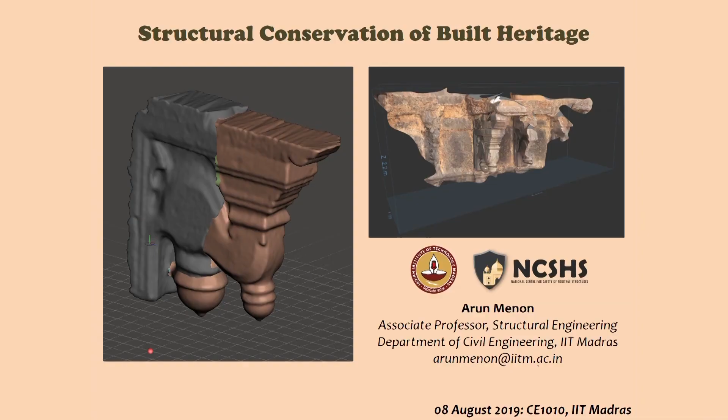I am Arun Menon, a faculty member in structural engineering, besides the building sciences block. I did my bachelor's in architecture, then moved into civil engineering, did my MTech in building technology and construction management, and then my PhD in earthquake engineering. I focus on masonry, and that's how this interest in historical masonry structures and monuments came about.

As Professor Gettu mentioned, that logo next to the IIT logo is the logo of the center we run at the Department of Civil Engineering, referred to as the National Center for Safety of Heritage Structures. We're talking of structural safety. We work on a number of live projects in India and abroad, but we also do a lot of fundamental research in the subject of historical monuments or built heritage in a broader sense.

Today I'll be talking about structural conservation of built heritage and how it is a highly interdisciplinary subject where you can connect based on the kind of interest you have in different subjects of arts and science. I'll take you through one example we've recently been working on, which gives a perspective of how multidisciplinary the problem can be, and challenging at times, where engineering comes in, engineering judgment has to be used, and tools available to engineers and researchers would have to be utilized.

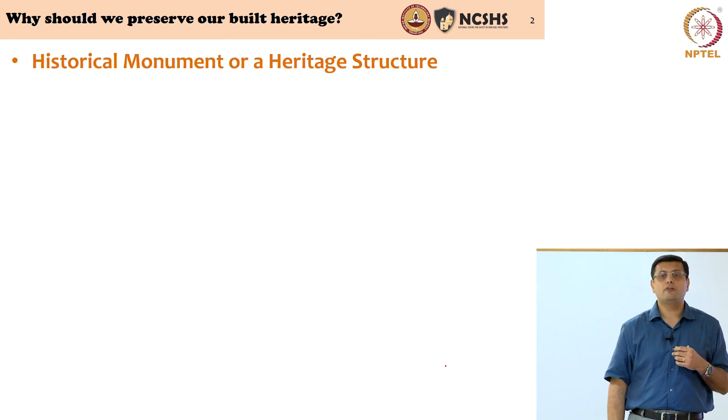We are either talking of monuments, which may be historical monuments or heritage structures. To give a definition, a heritage structure or historical monument is a structure created in the past. Some amount of time has passed from when it was established and constructed to commemorate a historical event or a historical person, or which has become important to a community.

This community can be a local community—something very important to Chennai, or to IIT, the community of IIT. So it can be something that has become important to a community, a region, a state, a nation, or the world at large. This has now become a part of our history and our cultural heritage. That is what would define the built part of the cultural heritage itself.

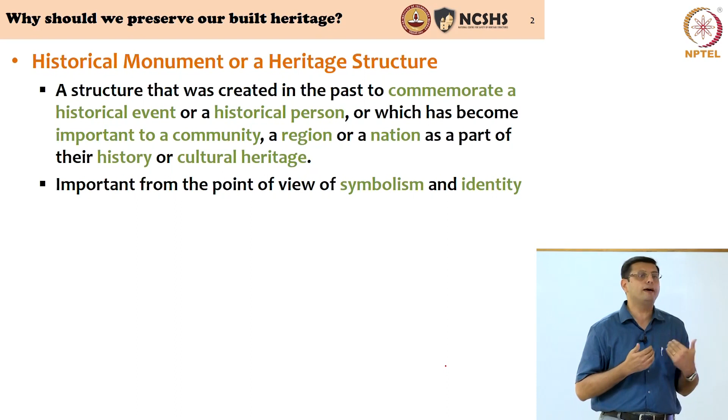Such an entity starts becoming important from a point of view of symbolism and identity. It tells me about my roots. It is symbolic to me as a physical form that exists in my territory.

What are we going to do about this? This was possibly not built when we were born, or even our immediate ancestors were born. Some of these were built 4,000 or 5,000 years ago, some maybe a few hundred years ago. So this is from a different period in time. Why should we be bothered about protecting them?

We should look at ourselves, in the context of historical monuments and heritage structures, as mere custodians of historical evidence. This is the physical historical evidence on earth, on territories, of how our ancestors lived and how their history and their times unfolded. Our responsibility is only as custodians to hand it over to the next generation, so that this historical evidence is available to them to understand where they come from and what their land means in the context of life on this earth.

Preserving historical monuments or heritage structures does not mean we have to go back to ancient times and live like our ancestors lived. That's not the purpose at all. The purpose is to understand how life evolved and how our ancestors lived. We can draw inspiration from that, look at what is relevant in today's context, apply that, and give new form to that inspiration. That's how we connect the history, the past, to the present and the future.

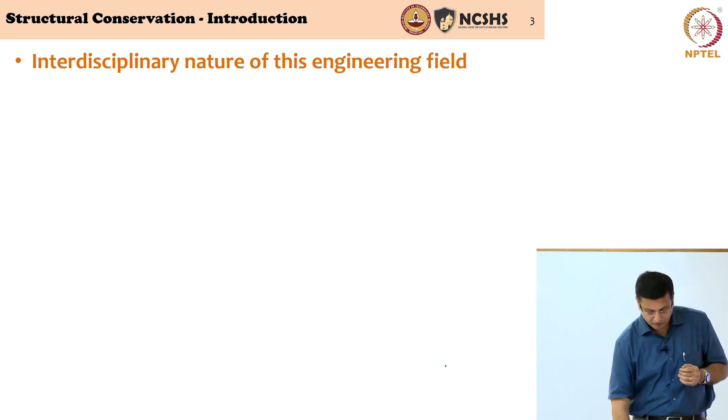So it's structural conservation that we are talking about, but it's a highly interdisciplinary field in engineering, and not only engineering—it actually has boundaries with many other disciplines. To give you probably not an exhaustive idea, but just to introduce you to the linkages with other subjects, there's a list that I've prepared.

Preservation of built heritage requires collaboration, fundamentally between the arts and the sciences. You've entered an engineering college, right? You need to engage with the arts and the humanities because there is relevance to everything that you do in engineering to human society.

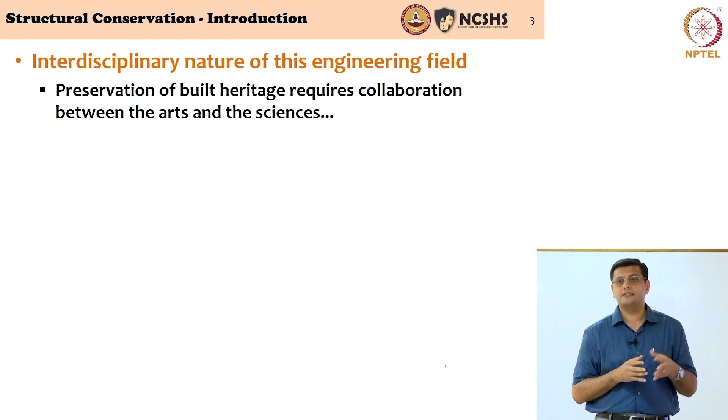And that is the reason why we have courses in humanities interlinked throughout your engineering program, because you need to understand the value of what you're doing and how it comes back to the society, how it comes back to the community. So you cannot differentiate between arts and science, and particularly in fields such as conservation of built heritage, it becomes primary to understand the linkage.

So many of you sitting here might have different interests. I had very different interests before I came to study architecture and engineering. And therefore, you can really connect to a certain passion that you have for a subject in this varied and interdisciplinary field—history of construction.

History of construction and archaeology, where you're studying about ruins and trying to reconstruct the way people lived in the past. Architecture—some of you might be interested in knowing different materials that have been used, different forms, different styles of architecture. You need to link up with architecture.

You need to learn, you may need to work with people who are in the area of material science and material engineering, because in civil engineering there's a limit to which we study materials. You might need a material scientist to take you further and understand the composition, the atoms, the way the material itself is formed.

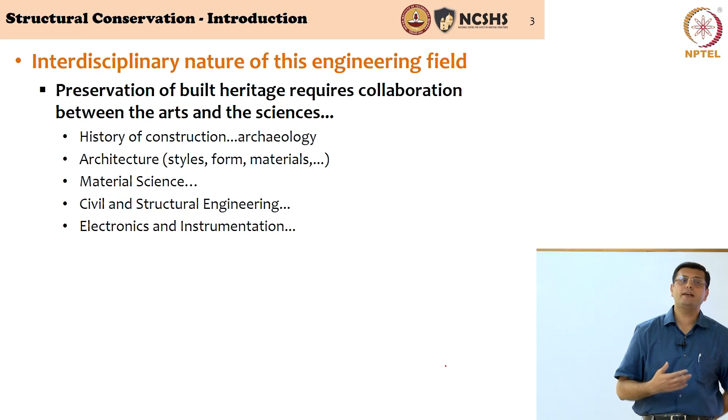Civil and structural engineering and geotechnical engineering—all disciplines of civil engineering. Electronics and instrumentation—today we are depending heavily on electronics and instrumentation to understand how these structures behave.

You can put sensors on these structures. You need to design these sensors and design the data acquisition systems, and have automatic methods, automatic techniques of getting information from these structures and understanding how they behave structurally. So you need to engage with experts from electronics and instrumentation.

Or you could have an interdisciplinary field of training and research for yourself. You can be a structural engineer and an electronics and instrumentation expert.

Computer science engineering—we are depending so heavily on computer science engineering because of the programs and algorithms you require to gather data from buildings, to process large data, the big data that we are talking about, to look at image processing and image reconstructions. You need expertise coming in from computer science and engineering.

Botanical sciences—would you ever think botanical sciences would be important in structural conservation? We have several cases where trees are growing on monuments. Have you seen trees growing on monuments?

Definitely you would have seen trees growing on monuments. In many cases, you have to have some idea of the type of vegetation that is growing to be able to either remove it or preserve it. We have dealt with very strange situations where both the monument and the trees had to be preserved.

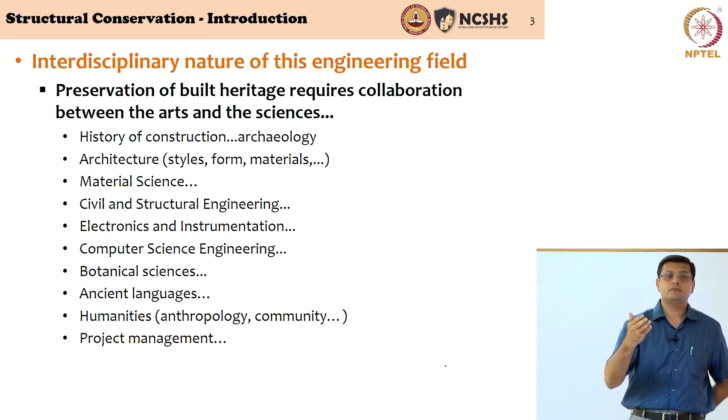Project management. If you're doing a huge project of conserving a monument, you need to have someone who is trained in construction project management, who will be able to sequence and utilize resources, men, material, labor in a technical skill in a proper and systematic manner.

And very often, the whole exercise is forensic in nature. Right? You've heard of the word forensic? Yes? And why does forensic come into civil engineering?

Very often, the damage that you see in these structures, you do not know why that has occurred. You would actually have to play the role of a detective and try and understand what was the reason for the damage. Because unless you know the reason for the damage, you will not be able to come up with a remedy in the right manner. So you will have to put on your hat as a detective, but a building detective, and then examine the structure and arrive at answers of what is the cause for damage before you intervene in such historical constructions.

These historical constructions have been here for hundreds of years, some of them thousands of years. So you have to respect it. It's been there for several centuries probably before you, and therefore it is with that respect that you must engage with these structures, and for that you need as much information as possible from these monuments, and very often we are acting as forensic engineers as far as historical monuments are concerned.

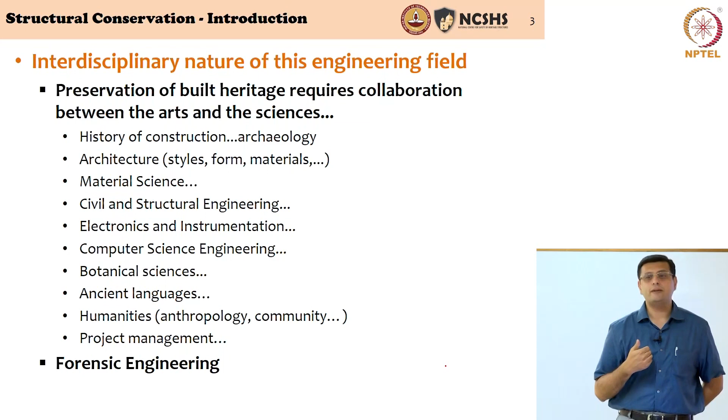Very interesting, I've had a very interesting training over the years. I was interested in medicine, but I didn't make it to the medicine field. I got into architecture and engineering, but today I find myself as a building doctor. And I see a lot of parallel. Of course, the blood and goo is not there, but I do see a lot of parallel between what a doctor in a medical profession would be doing, a surgeon would be doing, to what an engineer would be doing as far as rehabilitation of ancient buildings are concerned, right?

Okay, having said that, how do you operate within structural conservation? There should be a process, there should be a methodology, a modus operandi of how you operate. And this is where I say it's very similar to how a doctor would operate.

If when you're confronted with a problem, let's say your building is damaged, the first thing that you do, referred to as a stage, is referred to as anamnesis. And in the anamnesis stage, you're basically asking random questions to anybody who's engaging with the building. And this is to try and make some sense of what the problem is, how long the problem has been there, and so on. If you go to a doctor, the doctor would ask you, let's say you've got a headache and you're going there.

Have you had good sleep in the last few days? Or have you had temperature? What did you eat? You have these random questions that the doctor asks you so that he or she can structure the problem to get a hold of what is happening, right? That stage is called the anamnesis stage.

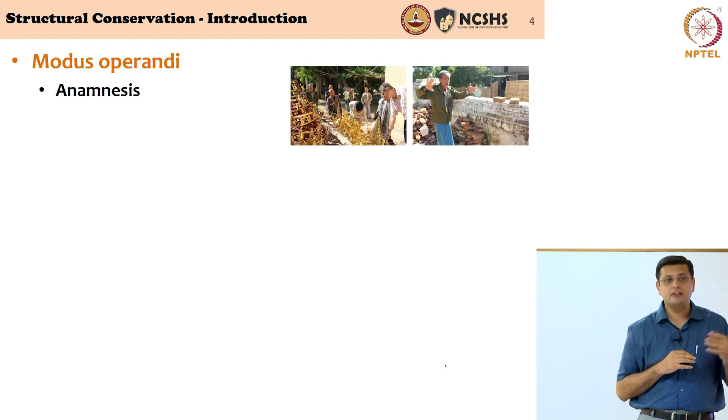The anamnesis stage is a set of questions, but the intention is to structure the whole understanding of what is happening. In a monument, you typically go and ask somebody, how long have you seen this crack in this building? Do you know if there was something that happened that led to this crack appearing? Do you see it increasing every month or every year? These are the kinds of questions. That's the inquiry stage, called the anamnesis stage.

The second stage is the diagnosis stage. There's a problem with the structure, or there's a problem with your health, and the doctor has to diagnose it. In the diagnosis stage, you're trying to understand the root cause of the problem. To do that, the doctor may say, I need your blood sample or some other samples from you. This will go to a laboratory, which will interpret the results and tell you if something comes out of it — yes, there's an infection, no, there's no infection. You're able to arrive at conclusions based on actual measurements from the structure. This is the diagnosis stage.

In the diagnosis stage, tests are required on samples from the structure, or in the structure itself. Blood is taken from your body and taken to a laboratory. If an ECG has to be taken, the instruments are put onto you, right on the body itself. Similarly, you could do tests on a building and then make measurements on the building directly.

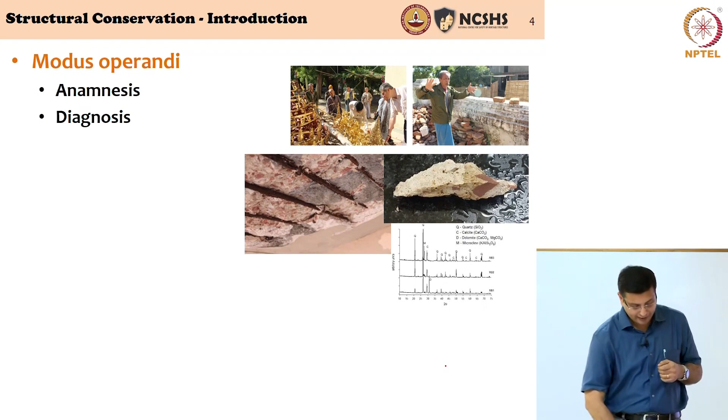Of course, with all this information, there must be a therapy. The doctor may be able to arrive at what should be done to make you feel better, and prescribe some medicines. Similarly, for a building, you need to do some analysis, and that's where structural engineering, geotechnical engineering, and the courses you will study would actually help you. You're able to understand what's happening to the structure and what would help it perform better. That's the therapy stage. Once therapy is prescribed, the hope is that it's actually addressing the problem.

The therapy must address the root cause of the problem. It may or may not. But how do you know if it's actually addressing the original problem? If the doctor gives you a week's prescription for medicines, and you come back and your headache still persists, or an infection in the blood still persists, there's a problem — because the diagnosis is probably not right and the therapy is also not right.

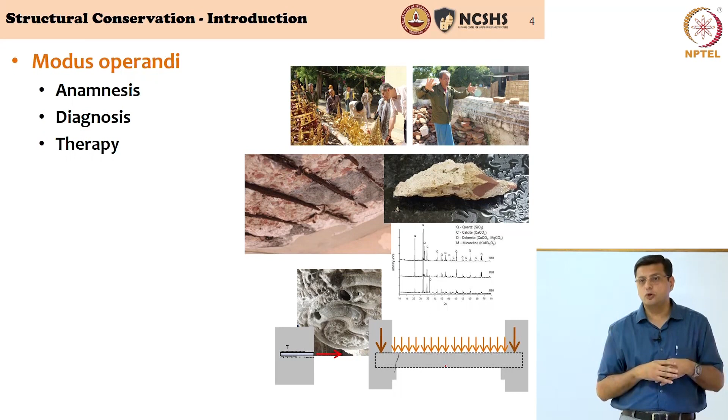So what would the doctor need to do to check if the therapy is working? They started with some blood tests. After a week of therapy, the doctor would probably say, take some more tests, or let me look at your symptoms, and arrive at whether it's working or not. So the final stage is the control stage, and in the control stage, again it is about taking some materials and testing, or putting some sensors and instruments on the structure, and checking if the structure is performing well or if the problem is still persisting.

If there was a wall that was tilting and then some repair has been done, and the wall continues to tilt because you are measuring the tilt in the wall, then you have a problem on hand. And therefore, these four stages — anamnesis, diagnosis, therapy and control — are cyclic in nature.

After the control stage, if things are not working, something is missing, you have to reformulate your questions and go back to the anamnesis stage — you have missed something. That's why I said you are acting as a detective in identifying what the problem is, to be able to arrive at a solution. So this is not a linear process, this is a cyclic process. At some point you might stop, because you would have actually cracked the problem and found the right solution.

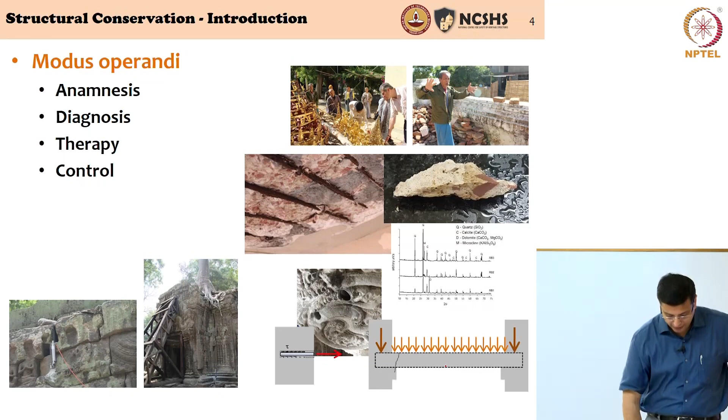A few years ago, we were asked to look at a few problems that the Rashtrapati Bhawan, or the Presidential Palace, has. So very briefly, this was not originally designed as the Rashtrapati Bhawan. It was originally designed for the Governor General of India, designed by Edwin Lutyens as the Viceroy's house. The designs were conceived at the beginning of the last century, but it was completed in the 1930s. 1915 was when the design was created.

You know that in 1911 the capital of India was shifted from Calcutta to New Delhi, and New Delhi was being constructed because that was the capital of the Sone Ki Chidiya, the Indian Empire which the British was holding. So the Presidential Palace was built as the house of the Viceroy, but the original designs wanted it to look like a European building.

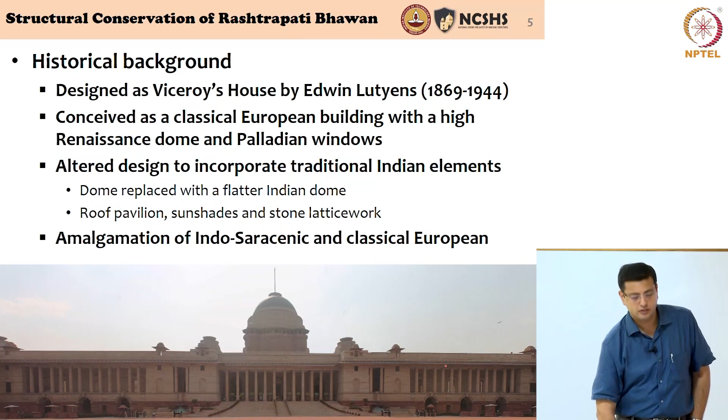At Rashtrapati Bhawan, we had the original drawing — a good thing. From the early 1900s, we had Edwin Lutyens' drawings on cloth, so large they would be spread out on the floor, with all the details and measured drawings. So we could look at the original designs and compare them to what was constructed in the building, to see if there were deviations and understand why the structure developed some damage.

So the fundamental problem was the crack in the dome we were looking at, and you've heard the name, the Durbar Hall. You must have seen news reports about functions happening in the Durbar Hall, like when the Padma Awards or the Bharat Ratna are presented. The Durbar Hall was meant to be the Viceroy's main room where he interacts with guests, but today it's where official government functions are held, including the distribution of Padma Awards. So what we are really trying to look at is the dome sitting above it.

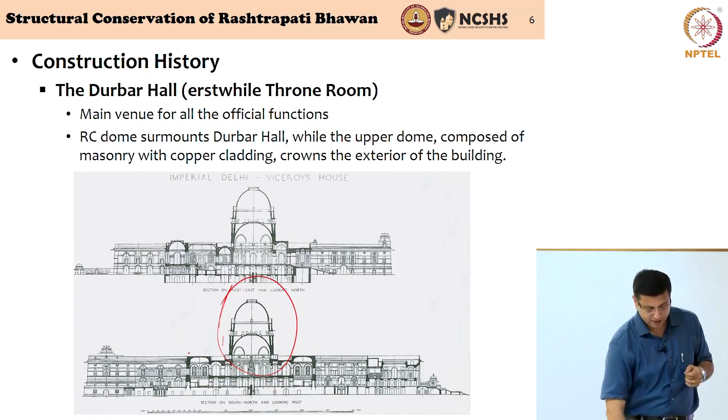The dome is right on top of the Durbar Hall, and this dome is the one which has some distress. That's a picture of the Durbar Hall. You can see how the dome rises up.

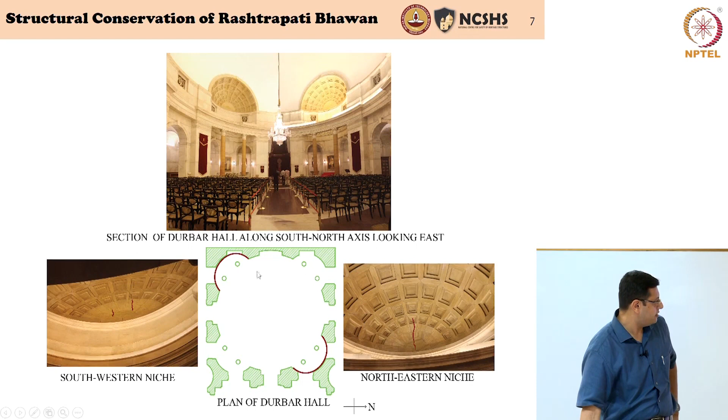That's the Durbar Hall, the dome rises up, and the problem was, can you see these two niches? That's like a cutout in the dome. In fact, there are 4 such cutouts. What you can see here, you can see 1, 2, 3, and 4.

Now, on the northeastern and the southwestern corners, where I have highlighted them in red, those 2 niches in the dome had cracks. One of the niches has a significant crack. You can see the red line here superposed on this picture, and on the other side there are 2 smaller cracks. So diametrically opposite, the northeastern and the southwestern niches had cracks.

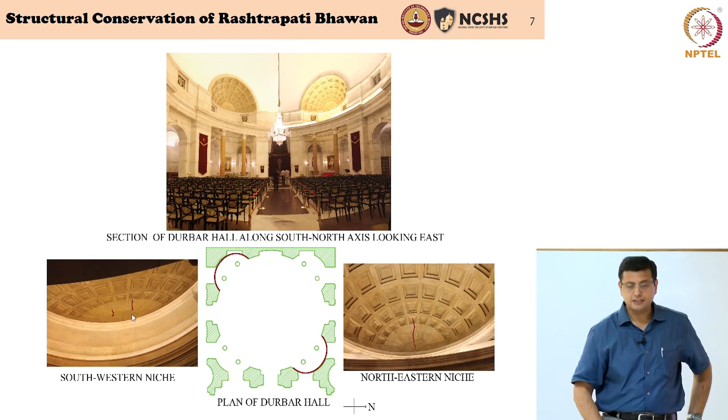And the fundamental problem is, domes are constructions which merely because of their shape would tend to open outwards, merely under their dead weight. You take a rubber ball, slice it into 2, take one hemisphere, place it on the ground and exert some pressure, the tendency of this hemisphere will be to open outwards. Particularly the lower portions would try to open outwards, which means it would introduce what we refer to as circumferential tension, and that's a characteristic of a dome.

Now, if you construct this in a material which has tensile resisting elements, which is a tensile resisting element in construction materials? What can resist tension? Any material that can resist tension? What's tension? I stretch and it doesn't fail. Concrete is not a tensile resisting material. Steel is a tensile resisting material, and that's why you have reinforced concrete. You put reinforcement inside concrete so that it carries tension. Reinforced concrete carries tension. Brick masonry does not have tensile resistance.

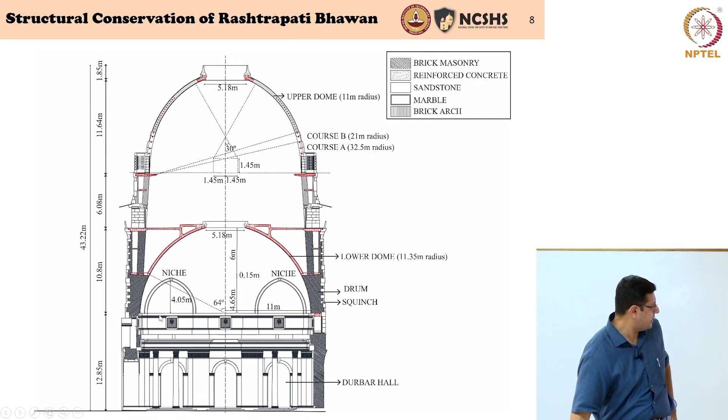So this part, which is a critical part of the dome, if you look at this as a hemisphere, you can see that the lower part may open outwards and can develop cracks due to tension, and unfortunately in that location there was no steel.

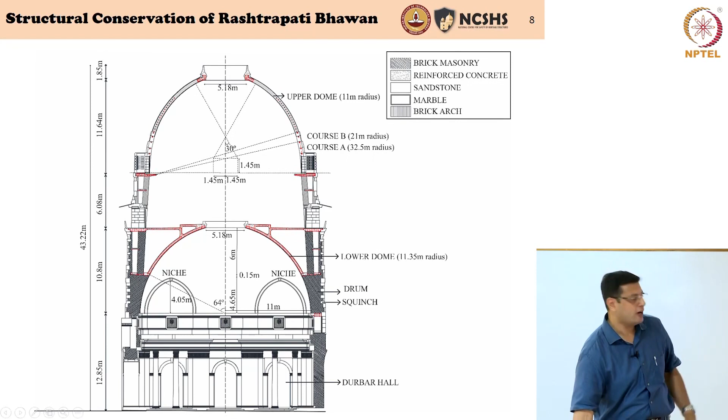So this was one fundamental problem. But keep your eyes on these niches, and I'll tell you something more about them.

We looked at the original drawings of Sir Edwin Lutyens, which we were lucky to have, and compared them to the actual structure. We hit upon another clue that might lead us to why the cracks happened on the northeastern corner and also showed up on the southwestern corner.

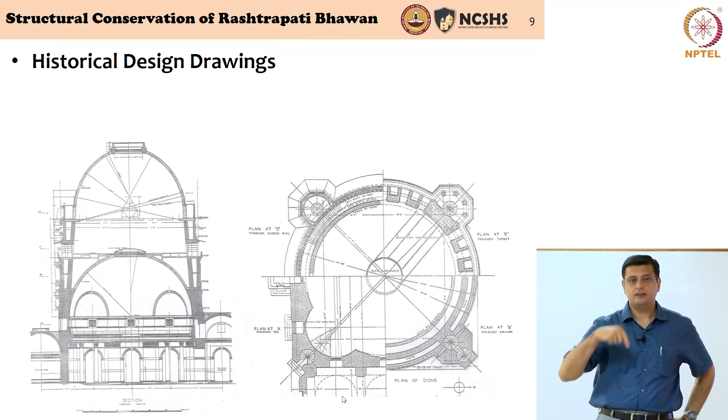This is why history of construction is very important in this subject. Looking at the original drawing, in the 4 corners of the dome, Edwin Lutyens had intended 4 spiral staircases—one in each corner. But when construction was completed, only 1 spiral or helicoidal staircase was actually built, while the other 3 locations did not have these spiral staircases.

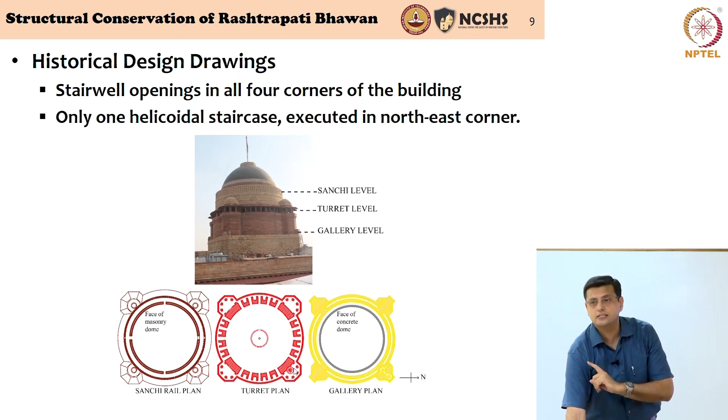So while executing, they deviated from the original plan, meaning a certain symmetry that existed in the original design was lost. We found that there was a staircase opening, a helicoidal staircase opening, only on the northeastern corner, whereas it was solid construction on the other 3 corners.

So we had to understand in more detail why this was cracking. It's a complex structure, so while we do some basic hand calculations, we also depend on complex computer-based simulation so the behavior of the structure can be understood more rigorously.

We developed the central portion of the structure as an isolated computer model—a structural model on which you can run analysis. You can apply gravity loads, lateral forces like earthquakes or wind, and so on. This is called finite element modeling or finite element analysis.

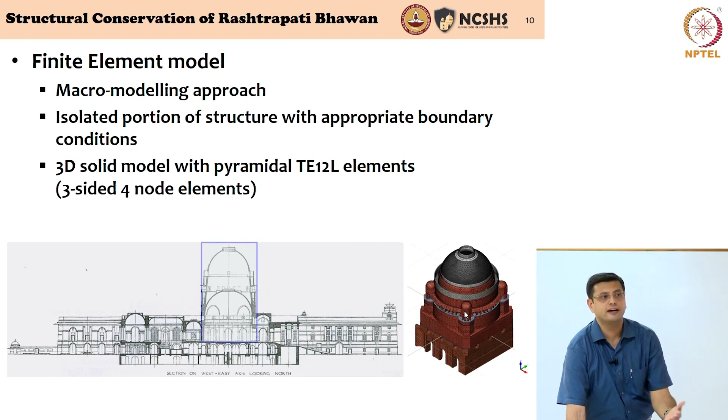We carried out gravity load analysis, dead weight analysis, and earthquake analysis as well—what would happen to the structure if there was an earthquake.

The second problem was that in the northeastern corner, it was further weakened by a stairwell or staircase opening. The gravity load analysis clearly showed us—you can see these light shades changing here, a light color coming in inside the niches—which is the indication of formation of tension cracks. So even under gravity load analysis, because of the niche in the dome's design, the absence of tensile resisting elements, and the presence of a stairwell in the northeastern corner but not the others, the crack had actually formed.

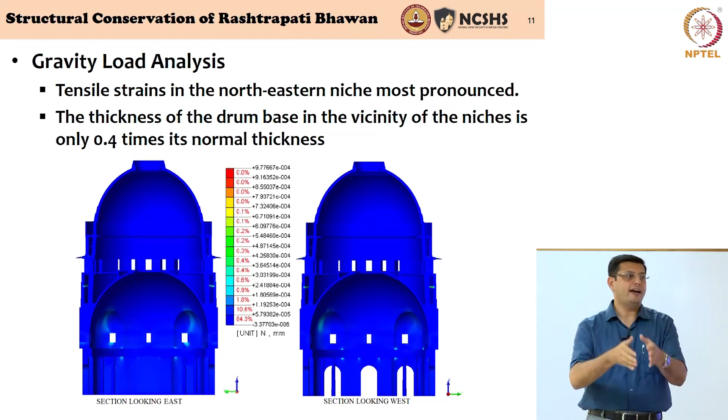This took us a few cycles to arrive at—iteratively we got to this point, almost like forensic work, chasing the issue to understand what was happening in the structure. This is a section of the plan, a cut section of the finite element model. We looked at the role the stairwell opening was playing, and it showed us that its presence was what was creating these tension cracks.

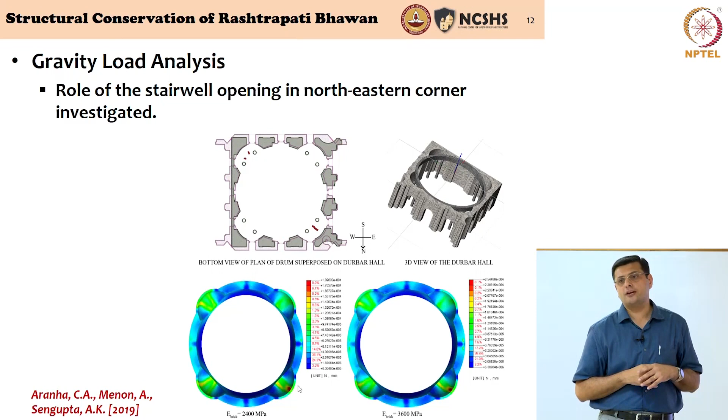Now having understood what the problem is, we can comfortably work on a solution, because we didn't want to work on a solution without knowing what was happening - then you may be completely going wrong. So this was the first aspect. In fact, in the Moodle site, there is a paper related to this. No need for you to read the paper, the slides are self-explanatory, but if you're interested in what was conducted, it's a little complex, you could read the paper to get a better understanding, and that's what is referred to at the bottom of the slide.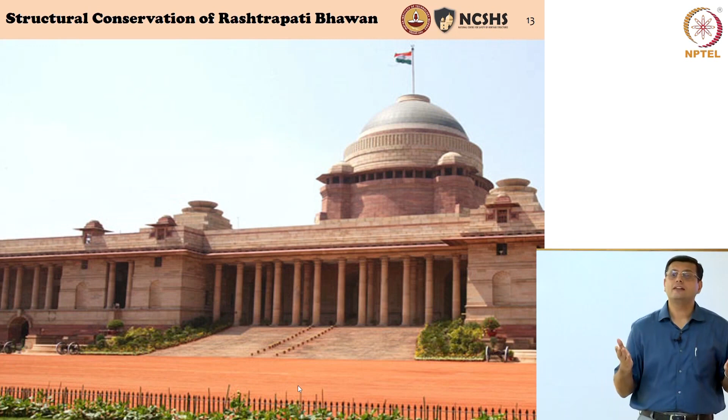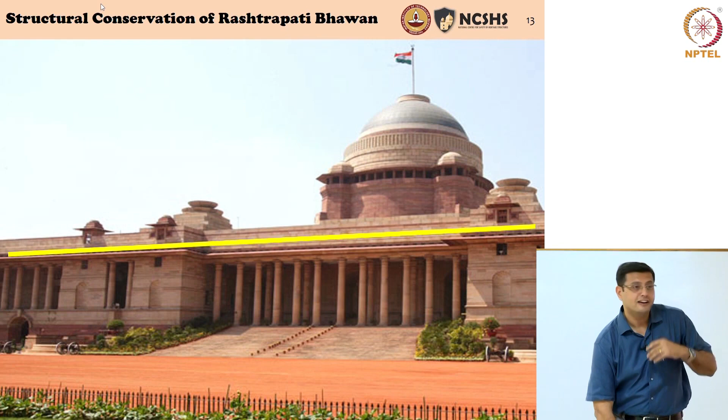The second thing, which was a more critical problem, was falling material from the sunshades. That's again Rashtrapati Bhavan, and we are talking of those sunshades which wrap around the entire building. Can you guess what's the length of sunshades in this building? 1.2 kilometers. So it's a huge building, and we had to deal with 1.2 kilometers of sunshades.

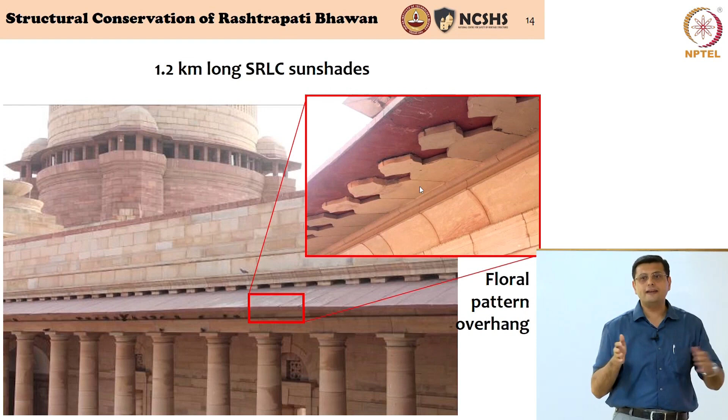And we had original drawings, so we went back to them, but we saw somebody had made some correction. As per Lutyens' design, Edwin Lutyens' original design, these were meant to be chhajjas like in the Rajasthani architecture - large cornices and sunshades made out of sandstone present in big buildings in Rajasthan, in western India. These people had drawn inspiration from ancient Indian architecture, so they wanted to bring this feature.

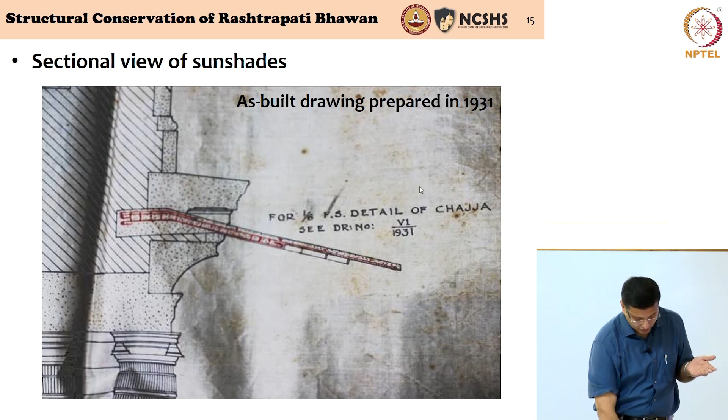They decided to make this in lime concrete. Lime was chuna, a material used for building construction in the early 1900s. They used that, put steel reinforcement inside, and completed all these sunshades. But the problem is, today, that is the status of the sunshades. They are at a height of about 50 feet, and you have material that falls as you're walking in and out of the building. You can imagine if a piece of lime concrete from a height of 50 feet were to hit anybody's head, you could actually have a fatal situation.

So this is a problem in reinforced structures. You need someone who has an idea of material science, an idea of electrochemical processes, who's working on material characterization and material repair to come and help us. And that's what we actually did - we worked closely with our building technology group, where we have corrosion scientists and people working on material repair, and we had to start understanding why this was corroding so much.

The reason why it was corroding so much, which you'll appreciate probably a little later in a civil engineering program, is when you have steel embedded within concrete, concrete protects steel. It does not allow moisture and air to diffuse and start the corrosion process, an electrochemical process in the steel. Unfortunately, in this construction, cement concrete as we know today was not used - lime concrete was used, because lime was abundantly available then. Today lime is not abundantly available, only cement is available. Lime concrete does not act as a good protector of steel - it is highly porous, allows moisture and air to pass into it, and does not act as a protecting layer for steel. That is the reason why 80 years down the line, almost all the steel is corroded.

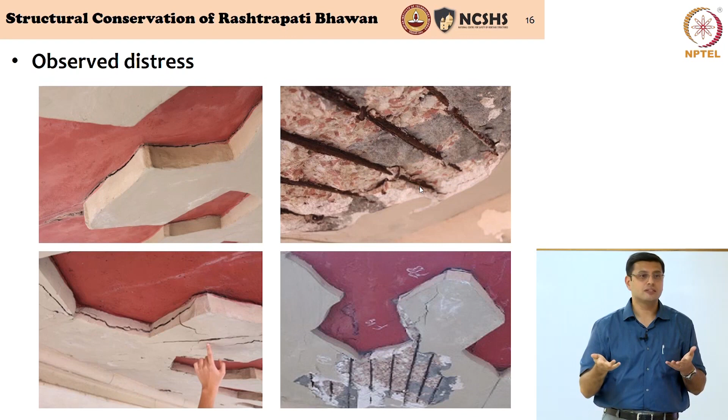So we actually had to understand if these sunshades could fail if load was placed on it. We had to do a test, and we were fortunate because they allowed us to do a test on some of the sunshades. We tried to take it to collapse, or tried to take it to failure.

So again, some investigations had to be carried out. We had to understand how much corrosion is happening, and because of corrosion in the steel, there was damage to the material, and that had to be assessed. We then had to understand it's 1.2 kilometers of sunshades. We could do a test in one location, but it may not be representative of another location. So we had to do a good coverage of the 1.2 kilometers to have a good idea of what was happening. Finally, we also had to do a load test on some of the sunshades to understand if the sunshades could fail in this sort of situation.

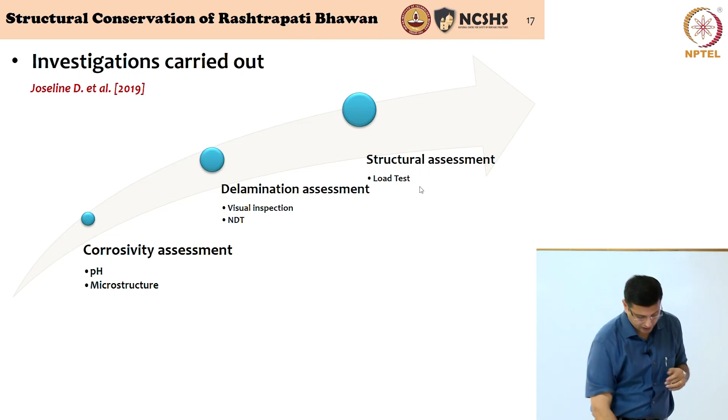So we did some laboratory tests to understand what was happening in the material. We had to do some non-destructive tests, and some tests on materials taken from the structure, taking it to a laboratory. But to get a better coverage of the 1.2 kilometers of sunshades, over 8 days, our team of researchers physically covered almost 30% of the 1.2 kilometers, which is a good representative proportion of the actual structure.

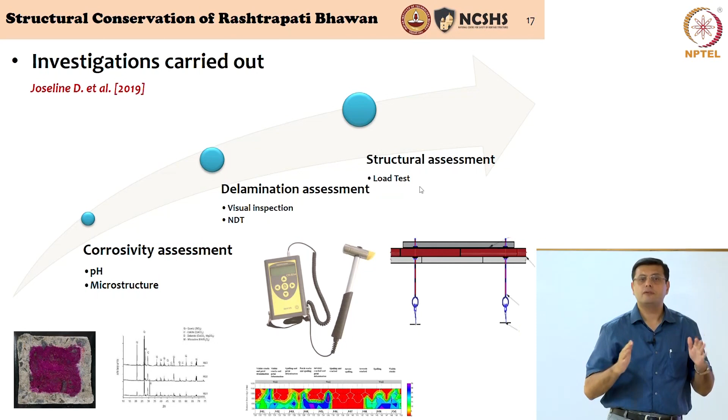And finally, we did the load test. We actually put some cables and tried to make the sunshade fail, and when it did not fail at the load levels that we calculated, we were comfortable that you do not have a collapse of the sunshade.

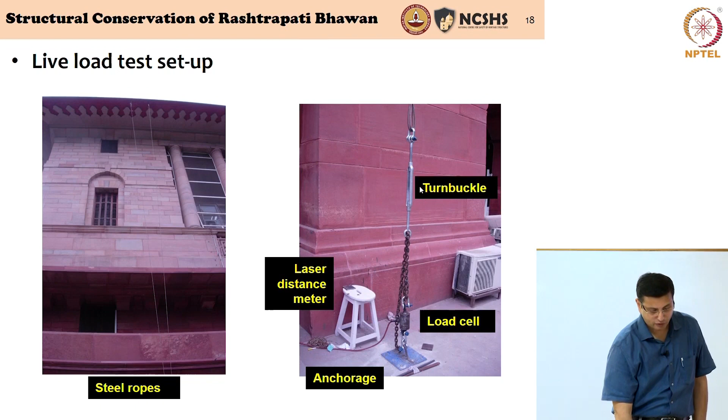So this is just a picture of the load test. We were pulling the sunshades down to simulate the weight of people standing on it and working to put the lights and take them off later. You can see our team there on top of Rashtrapati Bhavan sunshades.

We got there with fire trucks. You have this massive Volvo truck which has a portion that can take you all the way up and put you there. This fire truck would come along with us, and we were on the sunshades or beneath the sunshades doing all the tests. That's a picture taken by a drone of the work that was happening.

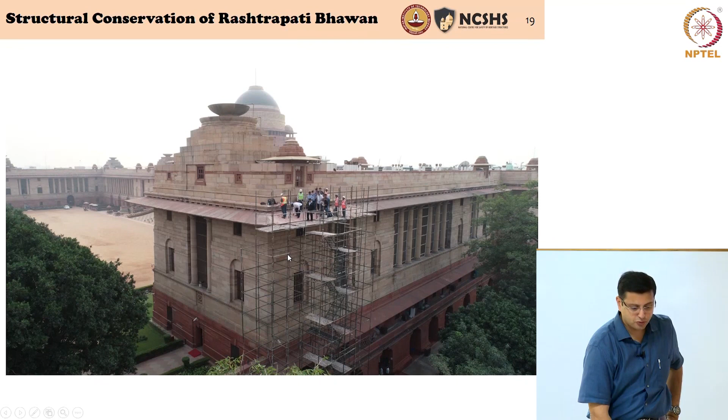Finally, in the last few months, we have actually come out with a repair methodology, and this repair methodology is being implemented. We have already implemented it on 10 meters of the sunshade, and we are now checking, because control is important, we are now checking if it is working, and we have 6 months of monitoring data.

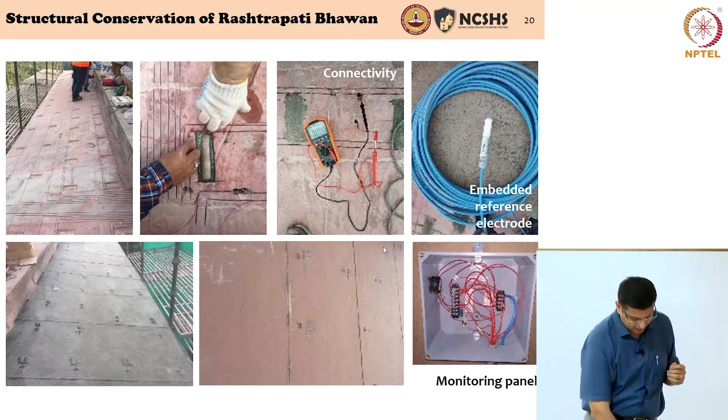You see these cables in different locations, information on current in the electrochemical process of corrosion is being measured, and it has now given us confidence that the technique we have applied seems to be working. Now a tender has been opened for the entire 1.2 kilometers of sunshades to be repaired. So this is really the whole project that we have been involved in.

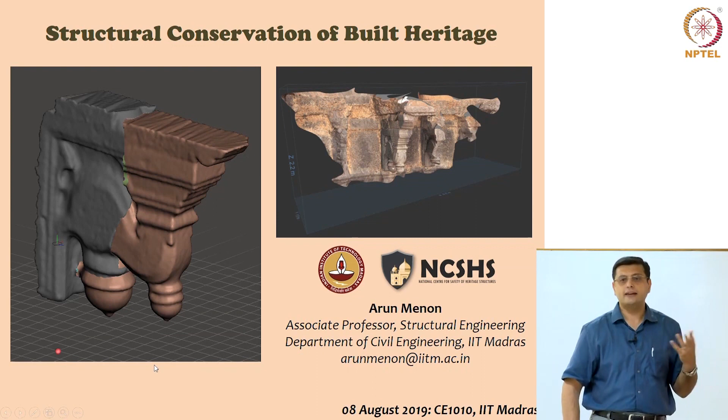I was talking to you about the need for image reconstruction in heritage conservation, working with computer science engineers. This is in Maharashtra, in Raigad Fort, where we are working to reconstruct some broken parts of Shivaji's fort, and we have used very simple tools, but numerical, quantitative, to be able to reconstruct broken parts of a structure, and this again requires interdisciplinary collaboration.

So with that, the idea was to tell you how interdisciplinary this subject is. It requires you to work as a forensic engineer, looking at repairing these structures or protecting these structures. Those of you who are interested can come and speak to us. We have a big group, and it will be interesting to collaborate. I'll stop here.